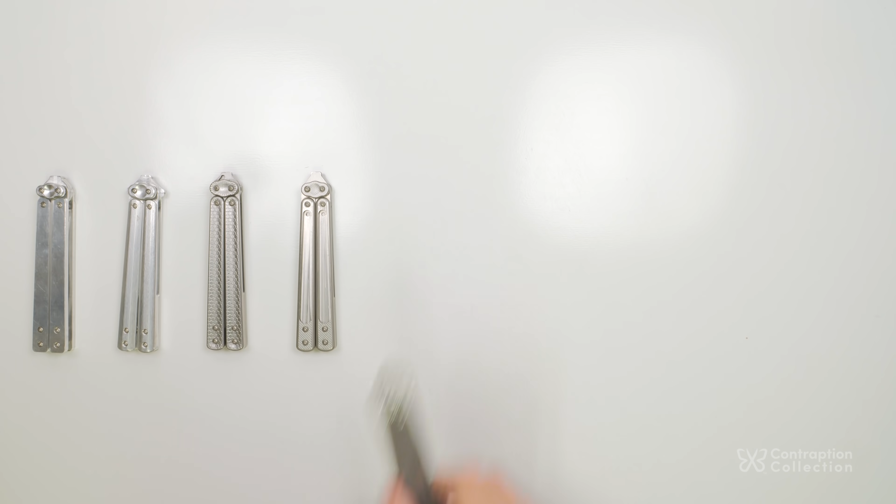Hey guys, I think I've had the wrong philosophy with the balisong scissors. I keep thinking that my next design will be the final one, the one where I don't have to change anything. I know it won't be, but I act like it is just in case I get lucky. Then it's good, but it doesn't answer all the questions I think it will.

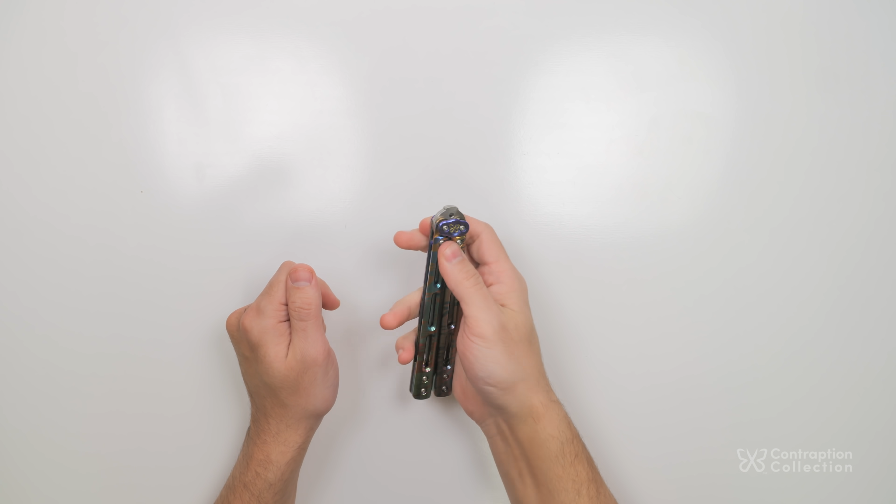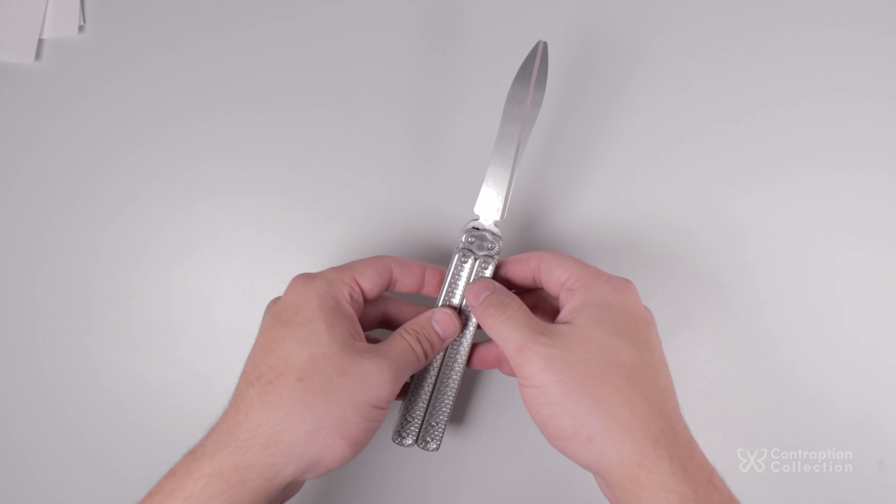The biggest thing stopping me from selling my scissors is the button. If I hand someone my scissors, they struggle to figure out how to press it. It's stuck, but I can press it. I have the magic touch. I know how to hold it just the right way so that I don't squeeze or twist the handles in ways that put things out of alignment. But even with the right technique, sometimes I still have trouble. I've spent so much time scrapping designs and making new designs just because of this button, and I was worried I'd have to again.

Turns out that was half true because I decided to try an aluminum handle design.

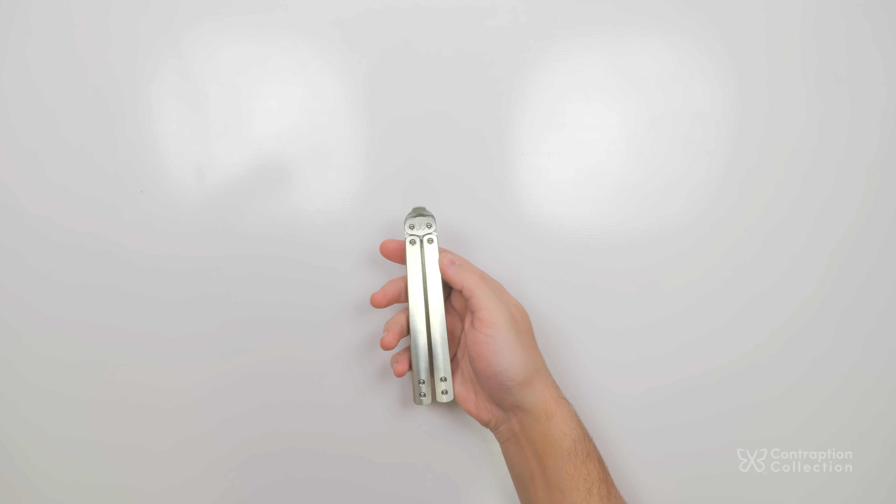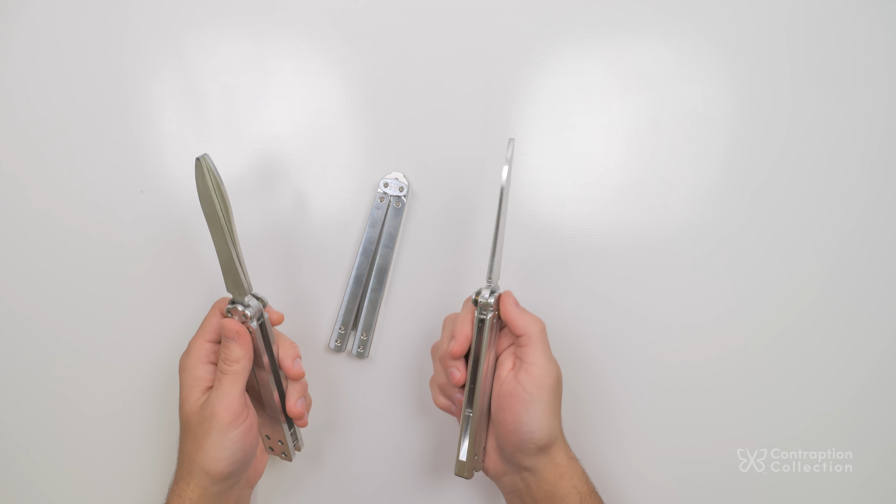People have asked me to make aluminum balisong scissors, probably because they know titanium is expensive. I resisted trying aluminum for two reasons. One, I was worried about the scissors wearing out quickly. I think my older, inferior designs made me a little overly concerned about this. But just to be safe, these I made with 7075 aluminum, which is much stronger than the more common 6061 aluminum.

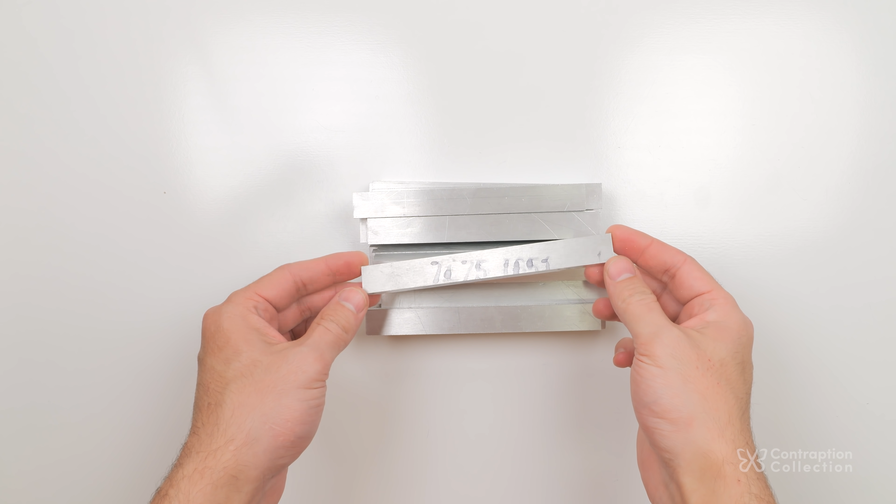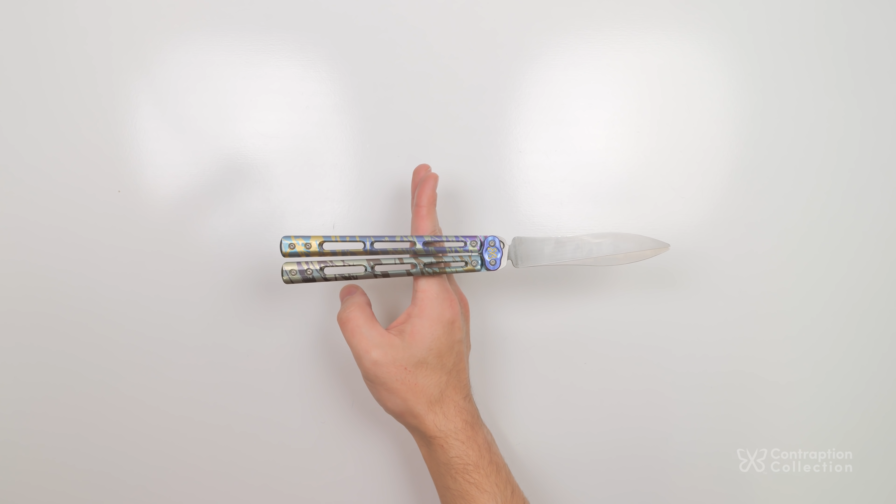For most of the time designing the balisong scissors, I wasn't sure I'd be able to balance the weight of the two blades. Luckily, the balance worked out with titanium, but I didn't really think it would be possible with aluminum.

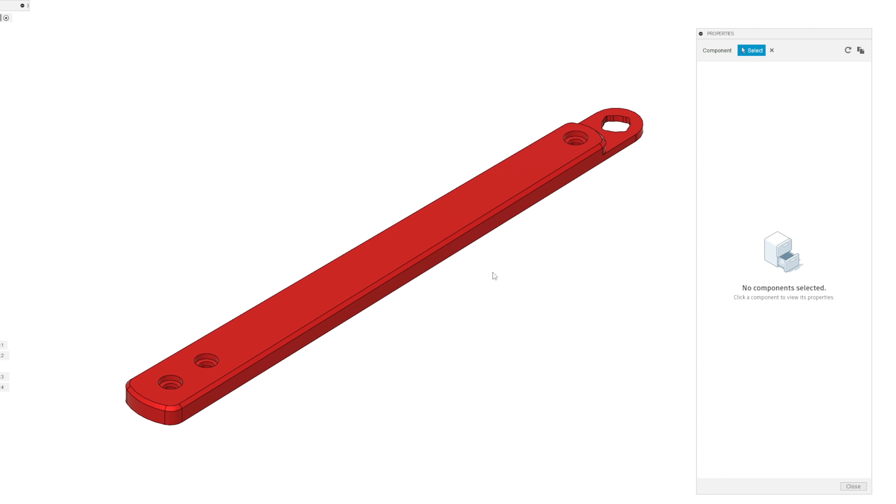At some point I tried designing handles with a simpler design. I thought it might be a good idea to make handles that could be made in 2 ops instead of 3, but I wasn't sure if it would work. I didn't have a ton of desire to make these handles, but then I realized that in aluminum, these simplified handles are actually almost exactly the same weight as my titanium design. So then I had to make them.

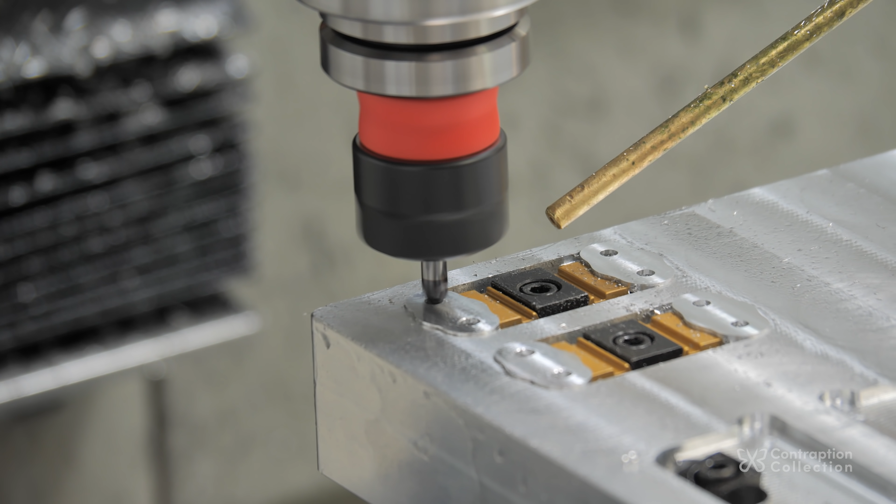And I'm so glad I did. It's totally changed my perspective on things. I'll talk more about the improvements in fixturing and machining I've done in my next video. Here, I just want to talk about other things I've learned.

Wintergatan put out a video that's really helped me sort out a lot of thoughts I've been having. In his video, he shows a different video of the Everyday Astronaut talking to Elon Musk. Musk explains a 5-step design process that goes like this.

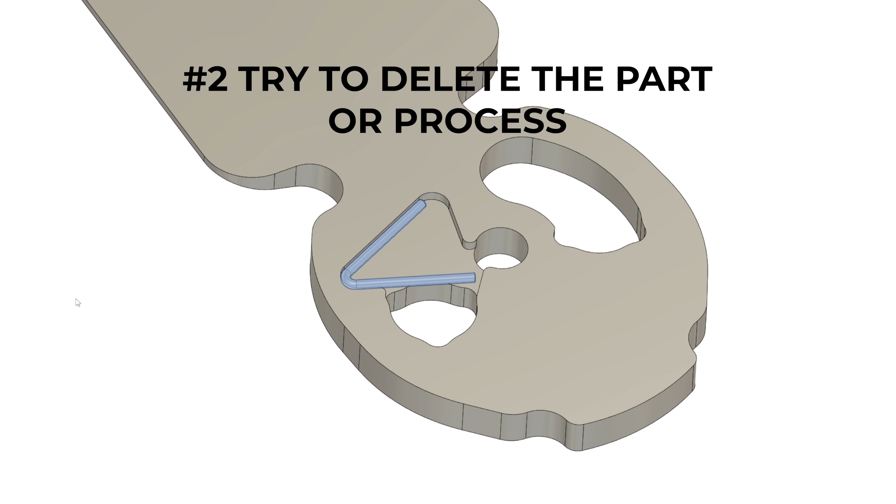1. Make the requirements less dumb. 2. Try to delete the part or process. 3. Simplify or optimize. 4. Accelerate cycle time. And 5. Automate.

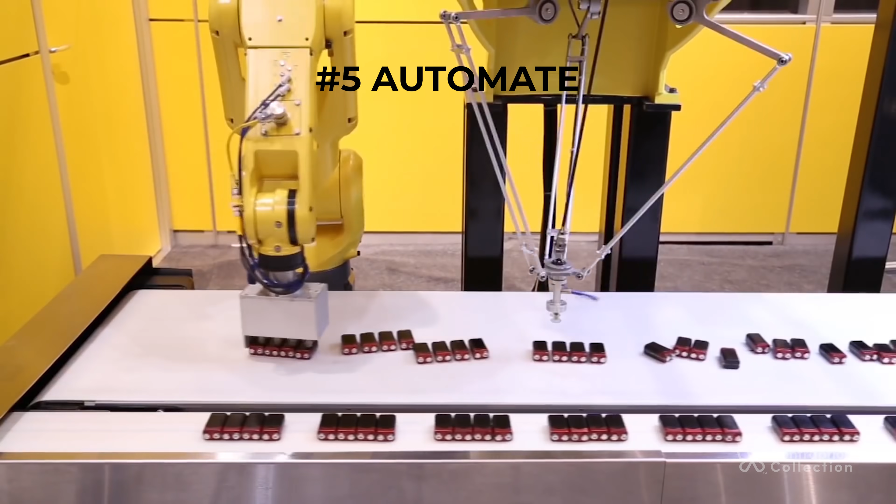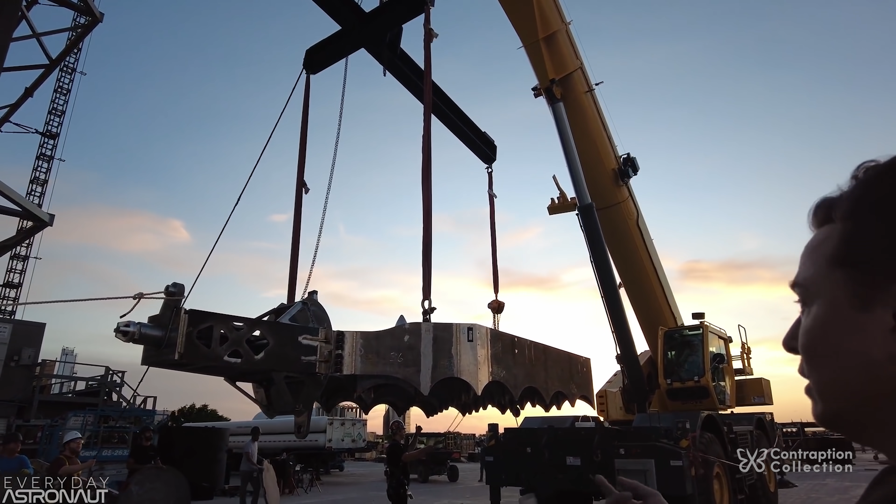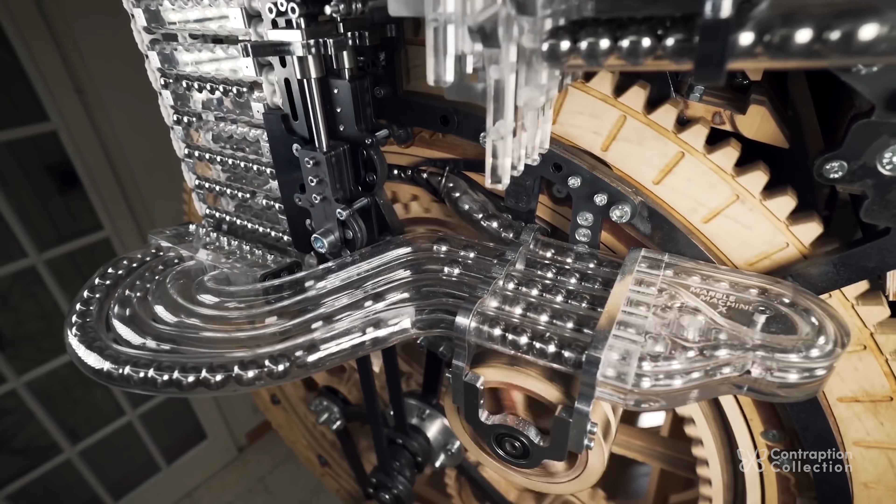The important part is the order of the process. People often end up going backwards and optimizing things that shouldn't exist. For SpaceX, this was making a rocket grid fin folding mechanism when it turns out the fins don't need to fold in. For Martin, he describes prioritizing form over function and feature creep as dumb requirements that slowed him down and hurt the reliability of his machine.

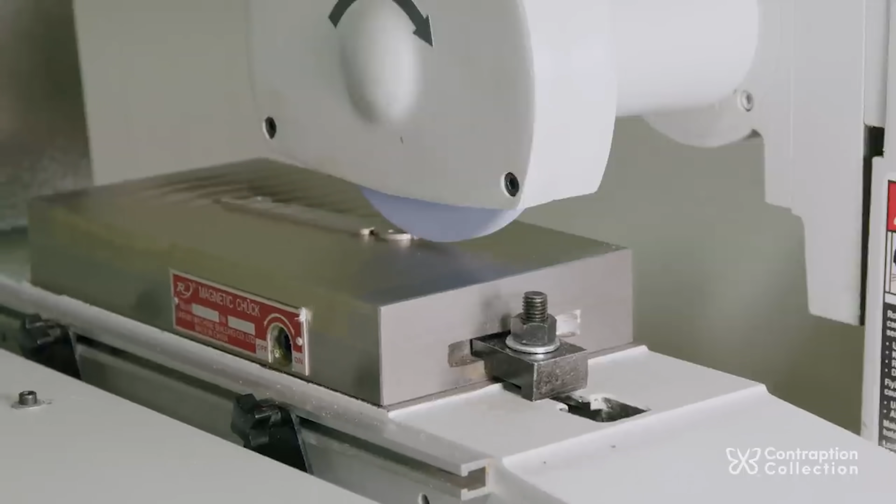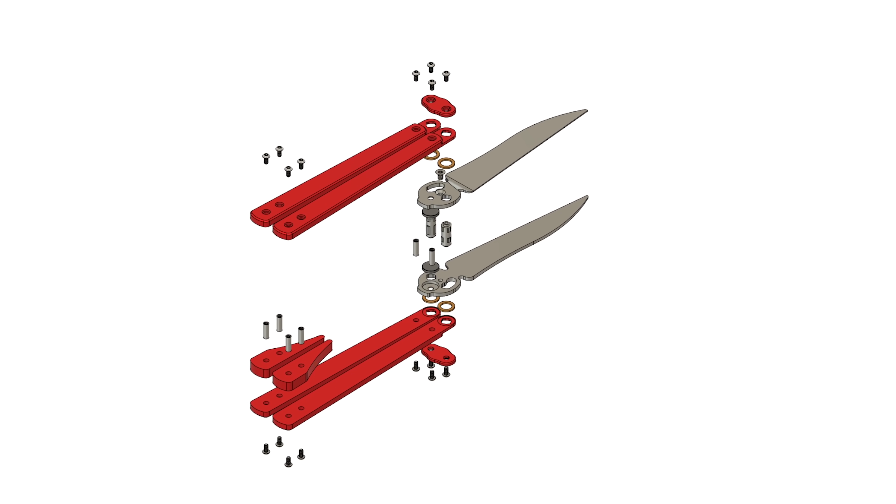In my last video, I tried to get super high accuracy with the surface grinder, and many people said that was a dumb requirement. Too tight of tolerances is an example of a dumb requirement, but in that video, I was just trying to learn surface grinding. I'm hoping I've designed things to not require overly tight tolerances, but I'm still trying to figure out the stickiness of the button.

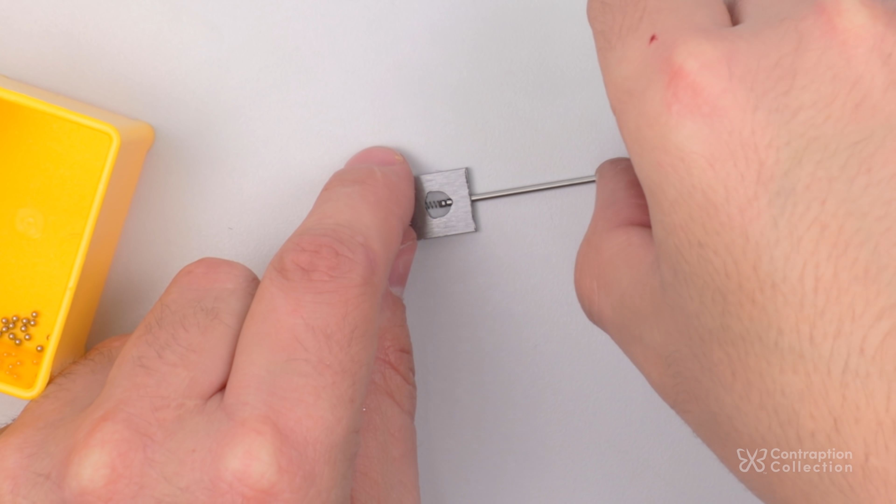Speaking of which, one of the requirements I've had since the beginning was a click mechanism for the button. In Fusion, there's nothing stopping the button from sliding all over the place. So I assumed I'd need a ball detent or something. I modeled many different ideas.

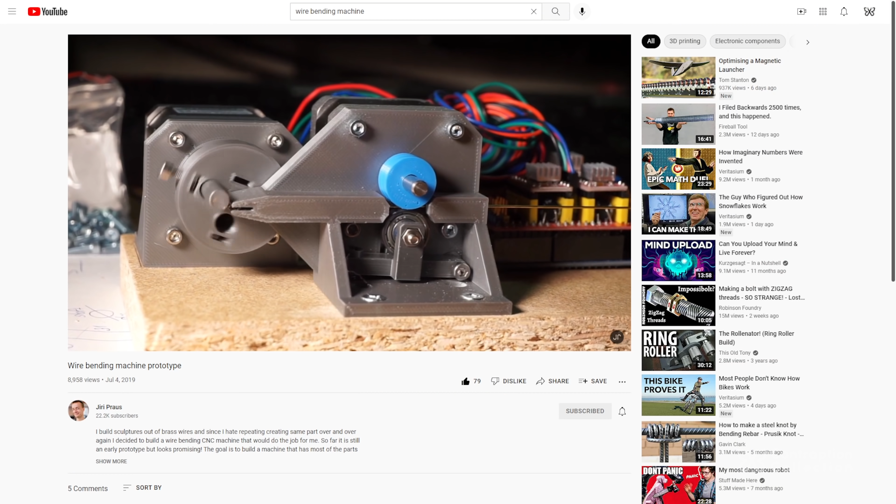I found one I liked using a wire spring. I spent time optimizing how it's machined into the blades. I even looked into making a spring bending machine.

I started with a thick wire, then went thinner and thinner and tried to optimize the groove depths in the blades. Then I realized the behavior I wanted was basically the same with no spring at all. I don't think I need a button click mechanism.

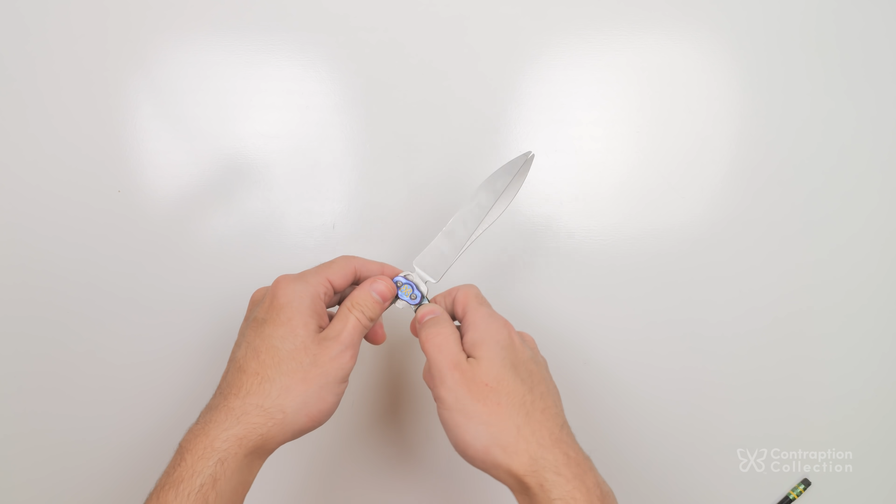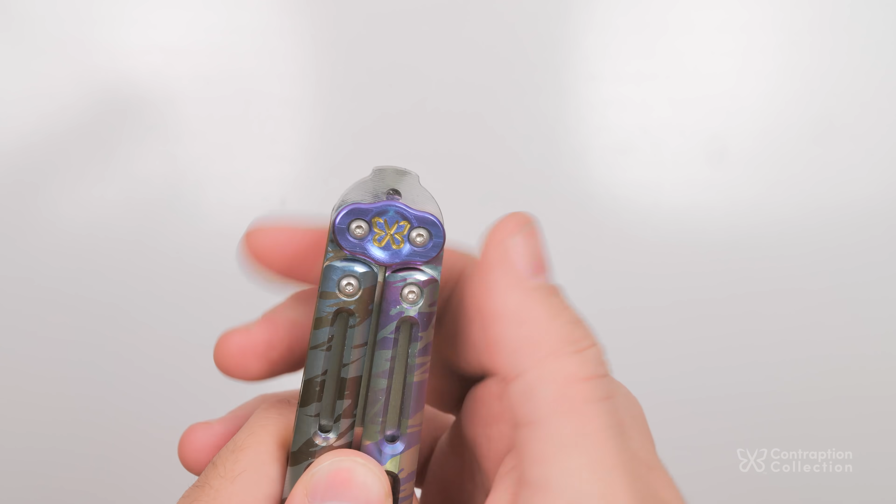I already designed things so the button can't be pressed at all unless the handles and blades are aligned in the right places. When they are aligned, magnets repel the blades apart, creating tension on the pins. My problem has been that the button is too hard to press, not too easy, and the click mechanism just made it worse.

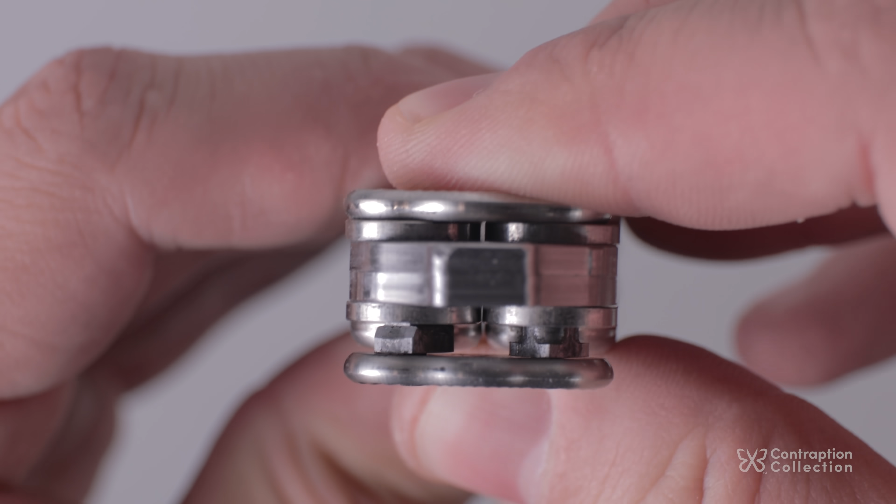I spent all this time optimizing when I should have tried deleting the part much sooner. And before that, I should have questioned the requirement of a button click mechanism in the first place.

Very early on, I also created another dumb requirement. I decided I wanted all 4 handles to be the same part. Making 4 of the same part is easier than making 4 different parts.

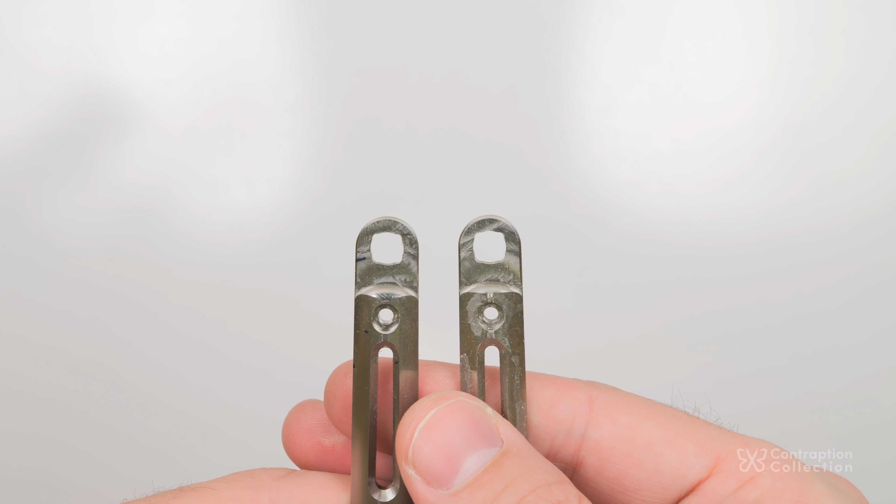When I allowed myself to make different mirrored handles, it solved the problem of the button being able to be pressed when the scissors are open, again reducing the need for a button click mechanism.

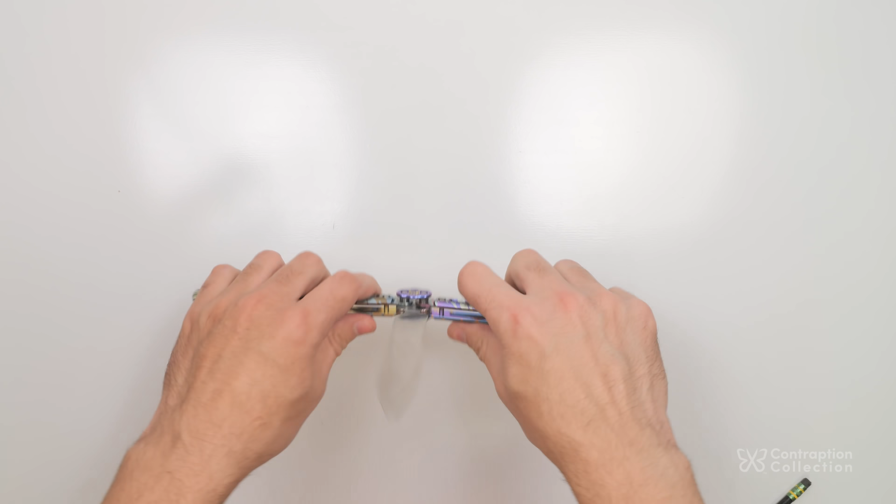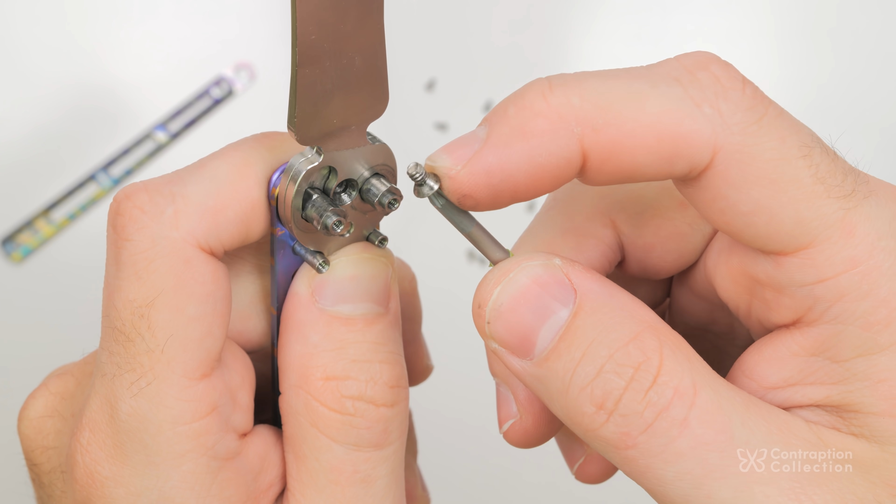I had the same requirement with the blades. I wanted both blades to be the same, so I had them go together with a pin. This isn't the smartest idea when you have magnets repelling the blades apart. Now I've started using a screw like normal scissors.

The time it would take to make slightly different parts is much less than the time I've spent trying to design functional balisong scissors with all these extra constraints.

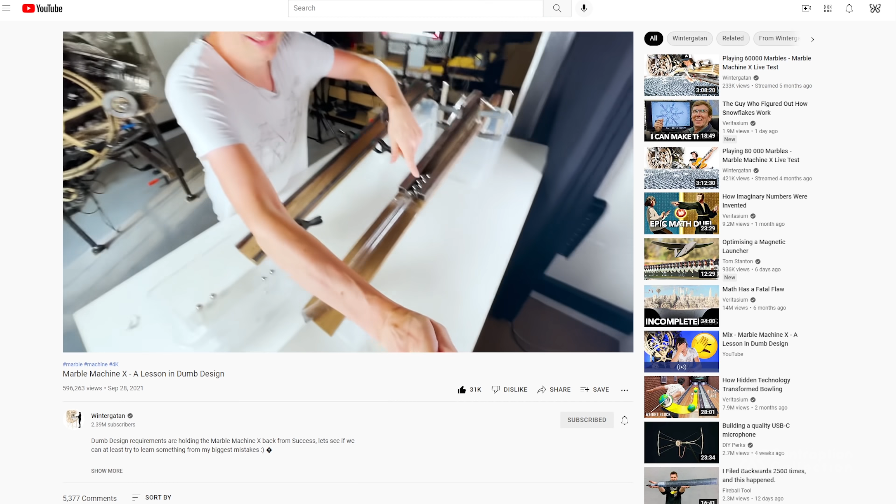The first step is to make the requirements less dumb, but it can be hard to tell what's a dumb requirement. Maybe it's easier to think about it as trying not to over-constrain your problem, especially in the prototyping phase.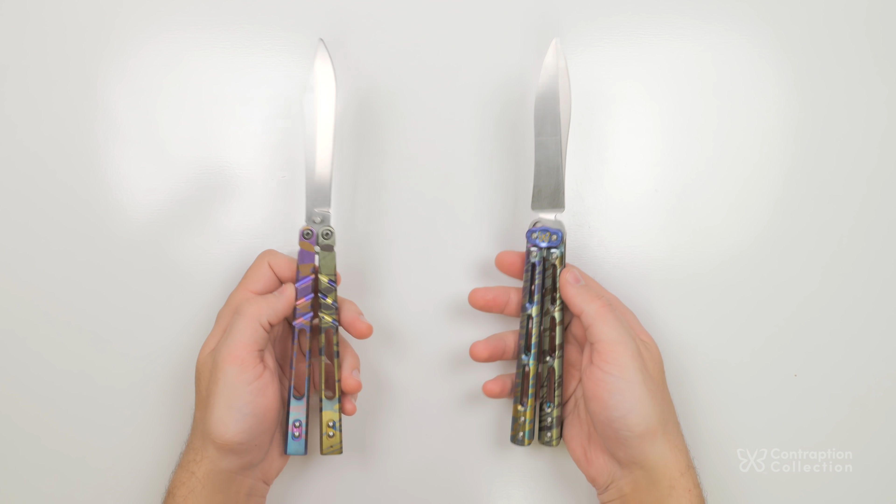I had a lot of early requirements. I wanted it to be functional as scissors and a balisong, of course, and I wanted it to be the size, weight, and balance of a balisong. I wanted it to have tapered handles like a balisong.

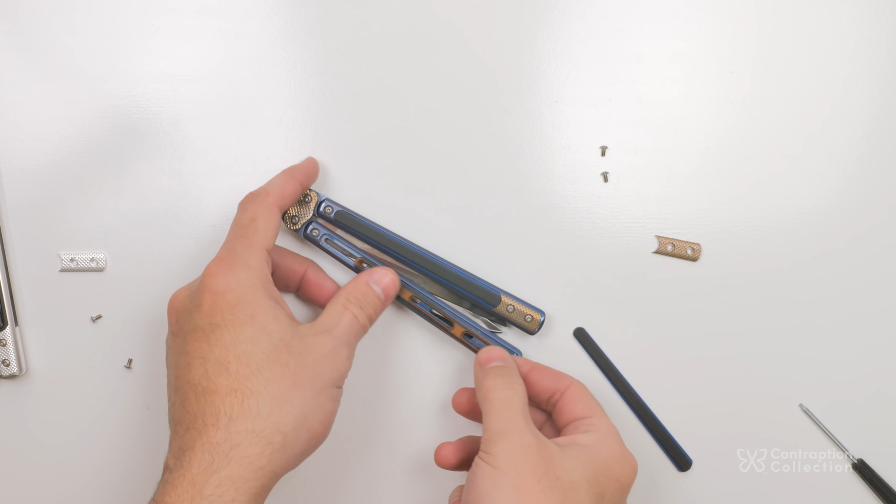I wanted a single button, not 2, and I wanted that button to also lock it in the closed position so I don't need a latch. I wanted it to be titanium, with interchangeable scales, and I also wanted to make all the parts myself.

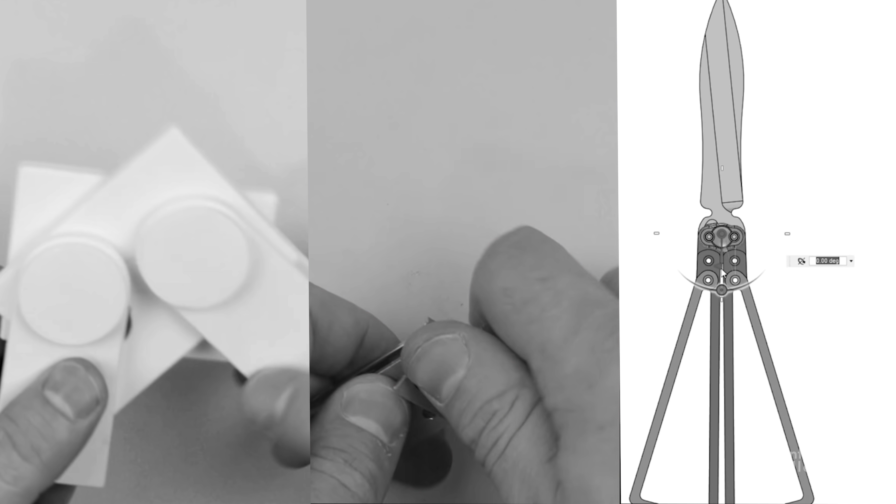And many other things. All of these were okay on their own, but the more requirements I added, the more time it took to get anywhere, and the more likely that solving the problem would be impossible.

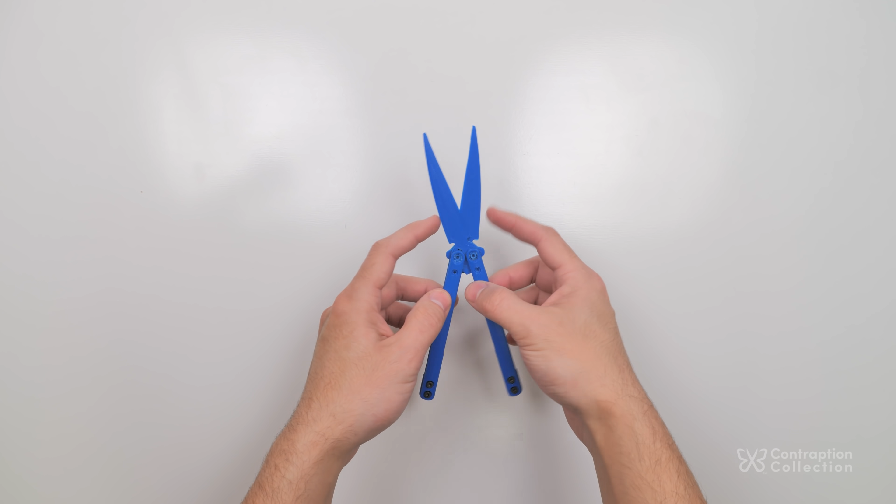Past me wasn't satisfied with a straight-handled, 2-buttoned aluminum design, but maybe I would have given that idea more of a shot if I knew the alternative was waiting years to sell anything. I thought I was iterating kind of slow, but I didn't realize just how much faster I could go.

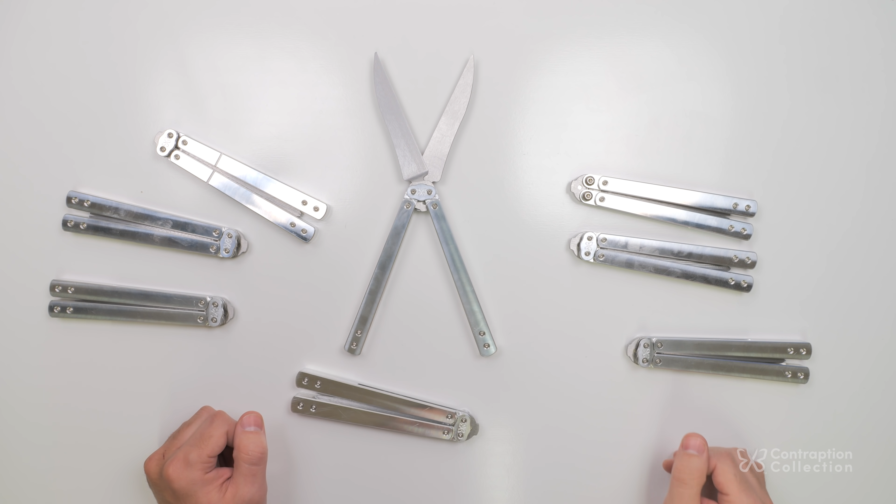All of these scissors have slight differences. This one's the most obvious. I've had this backup plan in my head for a while.

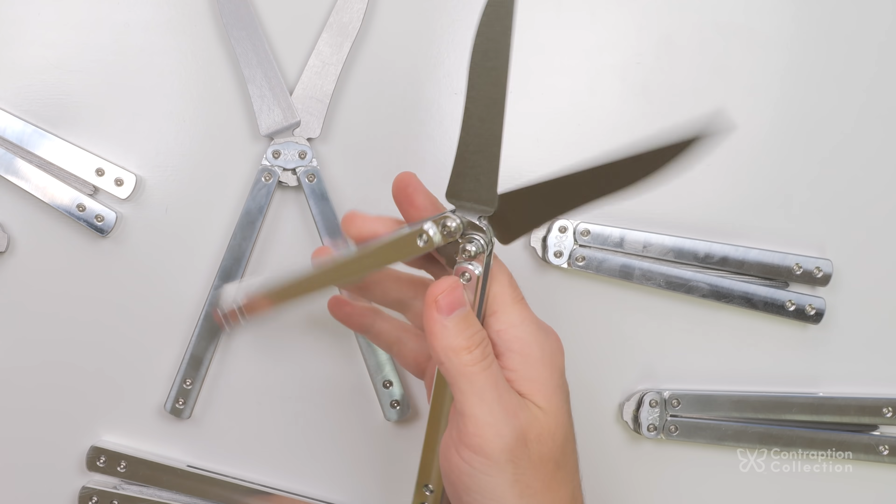Two separate buttons should have less alignment issues than one button because less is moving at once. However, it's actually still kind of finicky pressing the buttons. And in this design, the pins move in opposite directions, which I found out is not very intuitive to people.

Which means in the real world, turns out my backup plan isn't very good. I'm surprised, but also glad that I don't have to abandon the single button.

Most of the other changes were more subtle. What I've realized is I don't need to change my design. The best one I made is just like my last titanium one. It just took a few tries to come up with better machining techniques and get the fit just right.

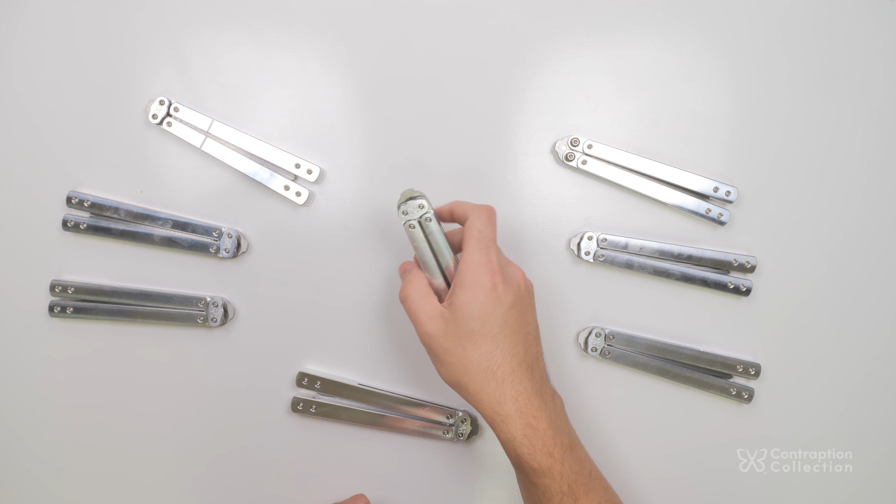Which is what I mostly suspected, but it's good I no longer have these what-if thoughts in my head. Also, actually using Loctite helps a lot. Now I'll try to start replicating the best one.